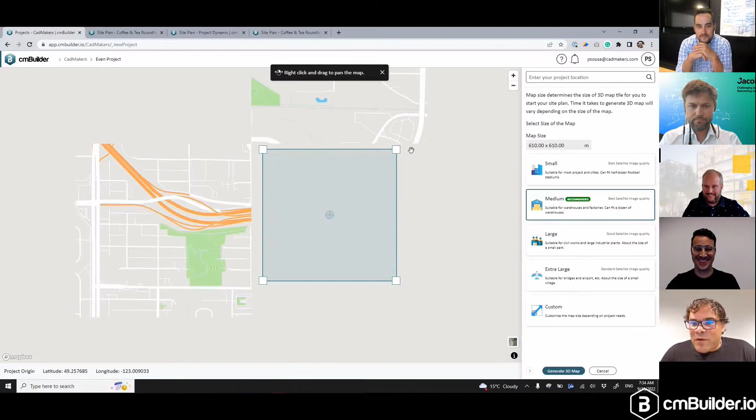For those who don't know, because many won't, cmBuilder is a 100% web-based construction planning and simulation product. It allows you to easily start by entering your address. What we're going to do now is show this new project creation flow. So we're going to call this Event Project. Even project, that's okay. And then you're instantly taken into this interactive map.

So let's go to Dallas, let's go check out what Dominic's doing downstairs. Let's go to Dallas, let's hit any address in the world, but let's start with Dallas. What it's going to do is just move you to that location in the world and allow you to set up a map tile of whatever your site's going to be. Set your pin in the middle of your map tile. For the purposes of this demo, we're going to come back up to Vancouver because we've already cooked the books here and we already have a site set up for this demo.

So what you're going to do is adjust small, medium, large, and you can move around the map tile how you want to set it. We're going to do a little spot here down in downtown Vancouver, BC, Canada, playing the home backyard card.

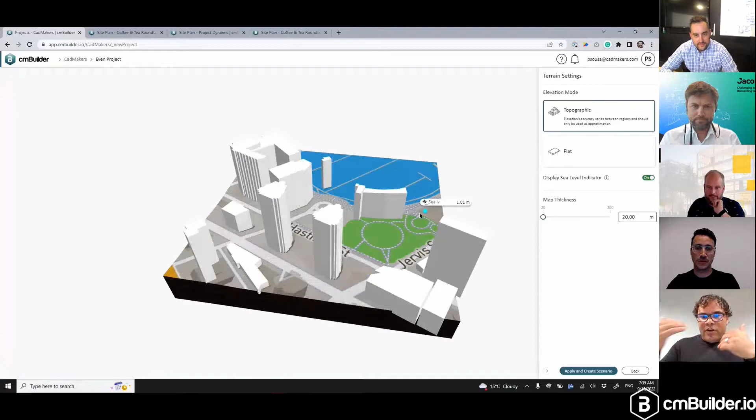Hit generate map. So what's happening now is it's computing, grabbing surrounding building information, topographic information, so you can flip from topographic to flat. If you go to flat, you can also adjust the map thickness if you're doing deep excavation. Some of our industrial customers need that, so you have a fully parametric way to set up your map tile. Let's go to topographic and hit apply.

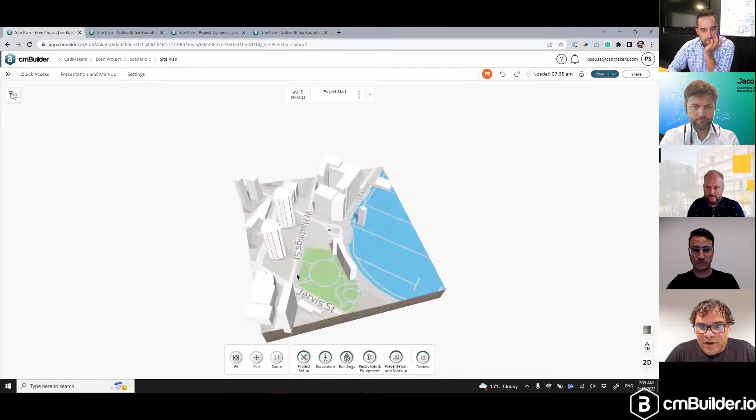And just like that, you're off to the races. So now you have an in-context view of your site with surrounding buildings. Those surrounding buildings are adjustable, you can add new massings on there, and you can start bringing in information. You can adjust from street view to satellite view.

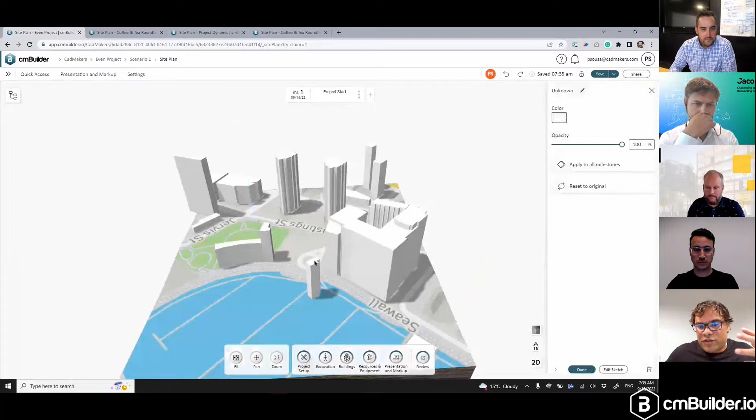You can do 3D mode, 2D mode. And if you go back to 3D mode and put on your topography lines, you can start visualizing the contour lines of the site. So if I go into my settings, you start visualizing what your topographic contour lines are at that site.

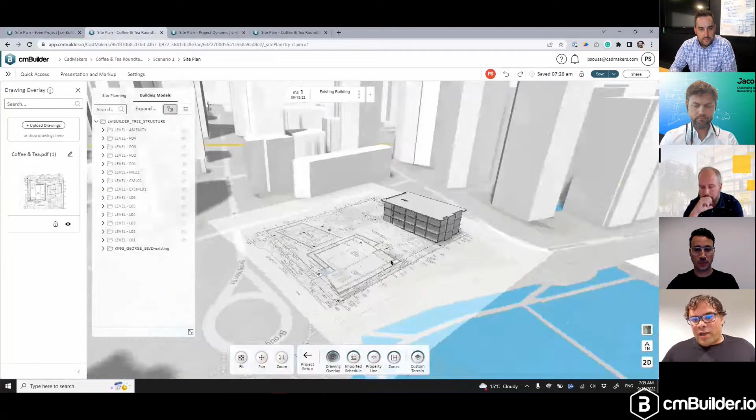Okay, so let's switch over to a new tab. We've taken that same site, imported a drawing, imported a model, and imported a schedule. Step one is we want to make sure we have as accurate a map tile as possible, because the model has the proper elevation in it and it's been snapped in.

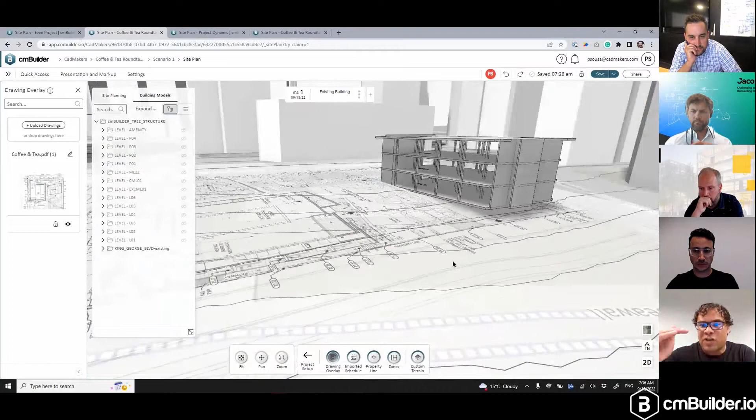We're now going to adjust. We're going to see here that the top of the map, the terrain auto-generated from the map, is a little bit off, as you can see. So the model and the actual topographic map tile are a bit off. We're going to start using our new adjust terrain feature to bring that map tile up and get a very accurate topography.

This is something Yves has been waiting for, and others. So, and us too. Yeah.

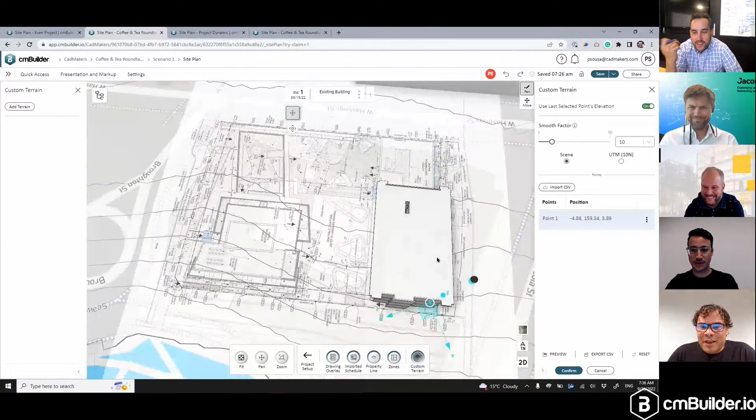The challenge is the speed of generating your map tile automatically just by putting in an address is fantastic, but because it's using satellite imagery and different types of data, sometimes the top of map, depending where you are in the world, can have a tolerance. So this is a recent addition allowing us a quick and easy way to adjust the top of the map and make sure we get a very accurate top of elevation.

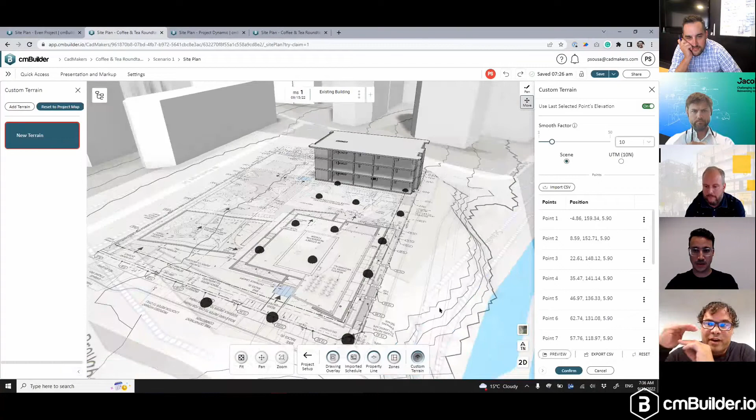We're going to basically snap the map tile up to the underside of the slab or whatever slab reference you're going to use. So what Pedro's doing now is he just added a few points manually. You can also just bring in a CSV, which is the more practical way to do this.

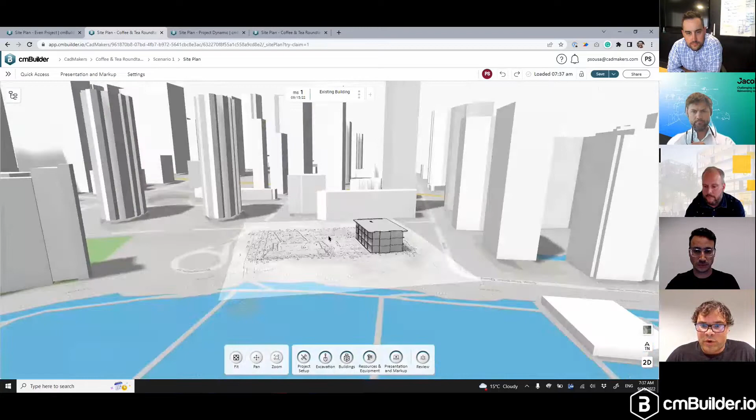So we're just going to refresh the page and you'll see that now the new map tile is going to be lined up where you need it to be. So if you zoom in here, there you go. We've just adjusted it, and you can control how smooth you want that contour to be.

And now once you've made the topo map bang on accurate, you're ready to start simulating, you're ready to start working. So first thing we're going to do is show the schedule integration.

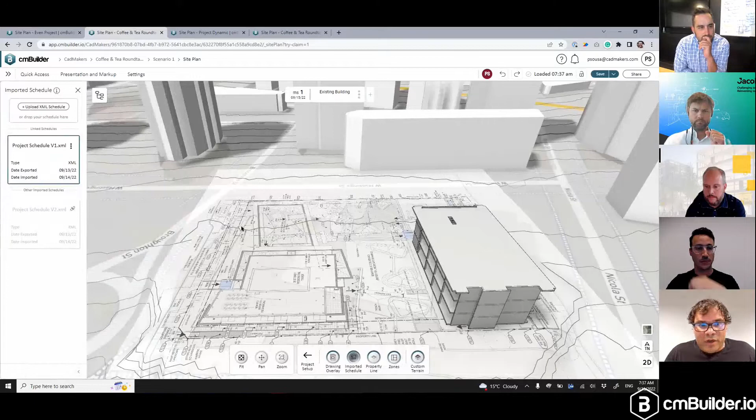So if I just quickly show, I've imported a schedule. It's an XML coming from P6 or Microsoft Project, wherever you are. You have instantly in your UI all the information you need to set up your milestones automatically, and then obviously bringing in BIM models as IFC, FBX, or STEP.

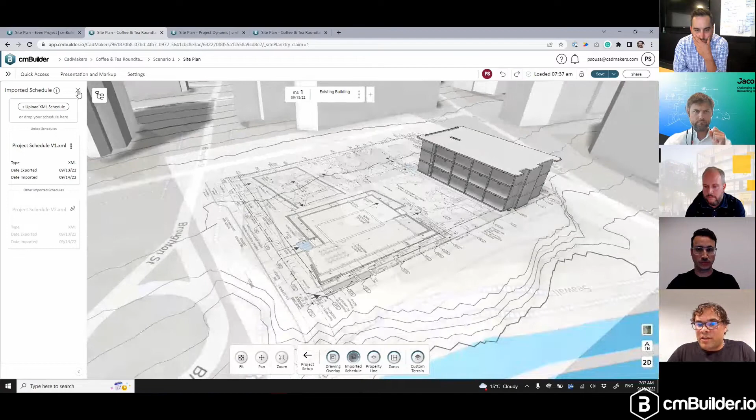We've already set up a few milestones, we've already linked up the model. So now Pedro's going to start simulating. Let's start where you want to start with fencing. Site setup. As we do the fencing, I'm going to grab a sip of coffee here.

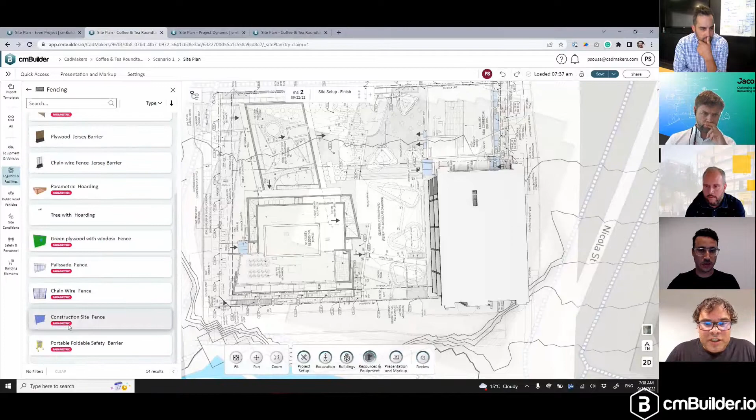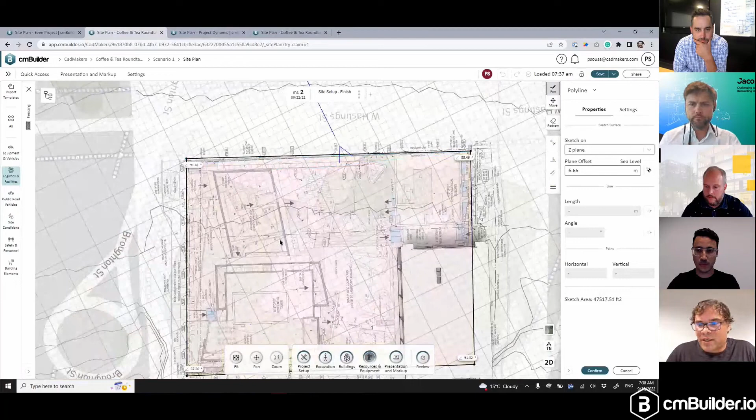Now we're just going to jump into our parametric resource catalog. As you can see, there's a couple new sketching features we could do, so it's really nice being an editor and a viewer on the web. Pedro's just going to drop in a couple points on a polyline and hit fence. As you can see, it automatically generates the geometry of that fence, calculates and moves it onto the topography automatically. Let's put in a gate.

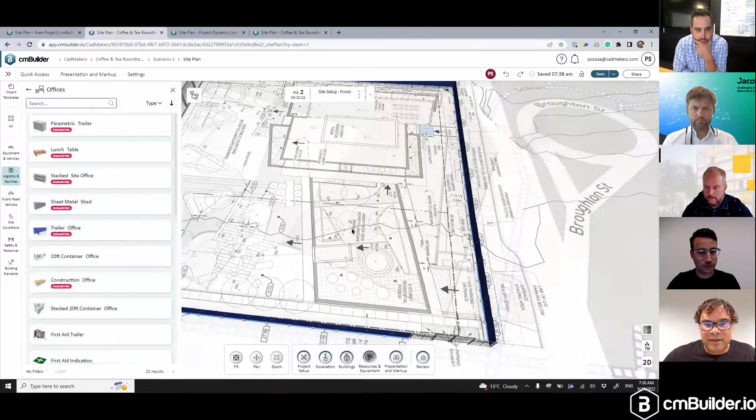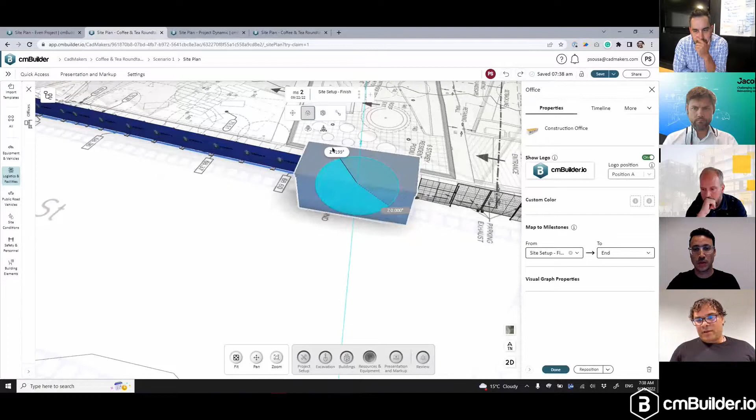So this is obviously something you could go much further with. We're going to show a more completed site at the end when we get into the site setup review or site logistics review. But we're going to add a gate, so think about access. All these resources are parametric—you can drop in a trailer, different types of tanks, soil remediation tanks. We've got hundreds of catalogs of resources. So we're not going to go crazy here.

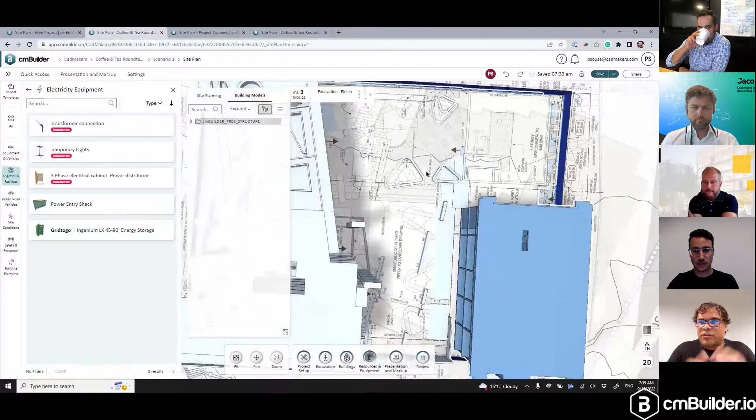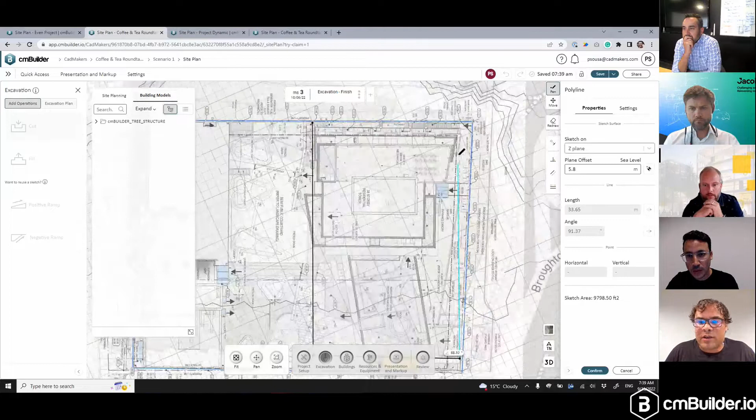Let's finish our site setup and get into excavation, starting the next level of planning. We're just going to do a couple excavation cuts and show a couple milestones using the new schedule sync and model sync feature, which automatically adjusts the input data and links to pre-made milestones. So you don't have to redo the sequence—just sync the model and you've got the same sequence with the new model, or sync your schedule and keep the same milestones, or choose to change the milestone dates from the synced schedule.

Pedro's just going to start drawing on the map and define the elevation. We actually have these handles now—you can just drag up and down the depth of the excavation, so you don't even have to put the values in if you don't want to.

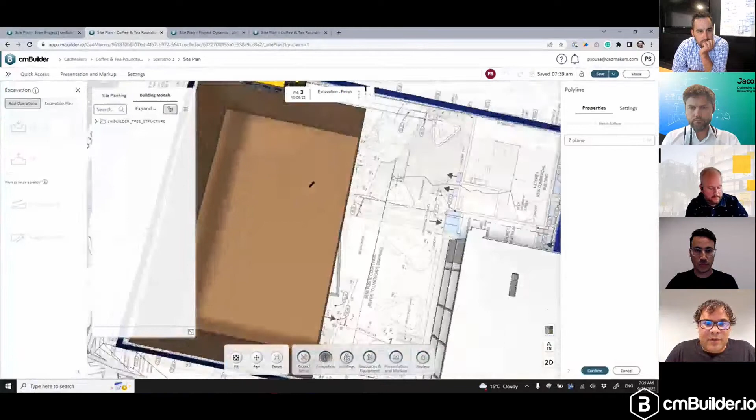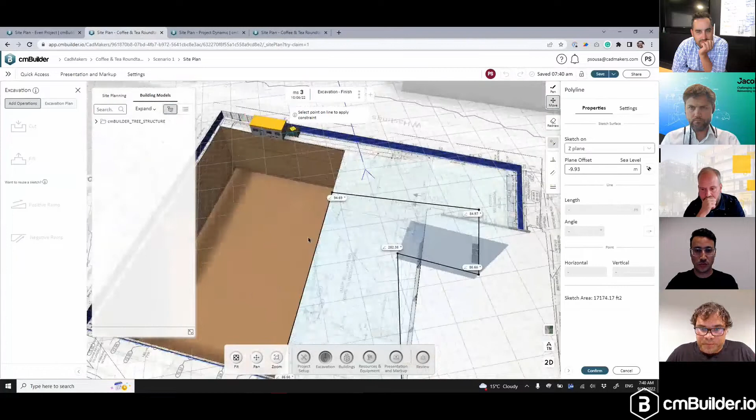Then as you do excavation cut 2, you have some options too while you're doing excavation, to have vertical shoring or sloped information on the excavation. You can control each face individually—you could say one side is going to be sloped, but these other sides are going to be vertically shored. We have a bunch of geotechnical options as well.

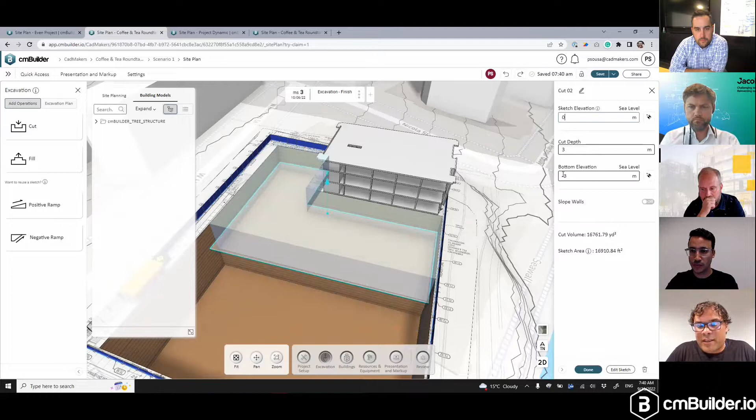What Pedro's doing here is just snapping to planes—for more accuracy, saying I want this line to snap to this plane and this line to snap to that one. This is part of our advanced polyline feature. The idea is to be light, easy, fast, and accurate. As you see, he quickly added a polyline and adjusted each of those lines to snap to faces, getting a perfectly bang-on excavation. We've got different elevations we're playing with here, and so on.

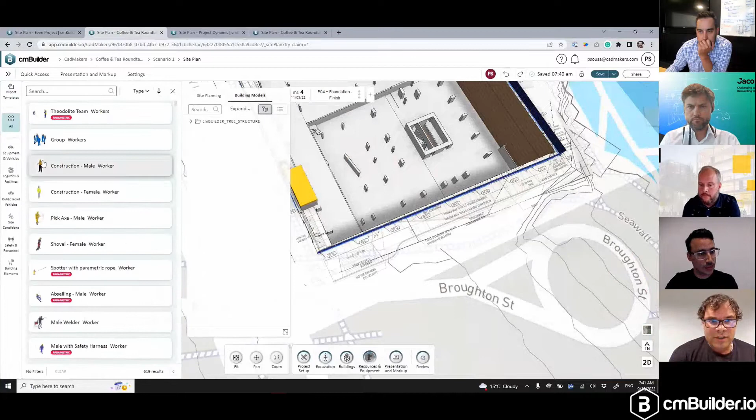Okay, so let's do foundation, and we'll do crane, and then we'll stop. So we've got the foundation. We want to drop in a concrete pump truck, perhaps, and show how those real resources in the catalog link to milestones. So let's search the catalog here for concrete pump trucks—you could just search it. Oh, there you go, so this is a parametric resource. All the boom arm angles are adjustable inside the browser.

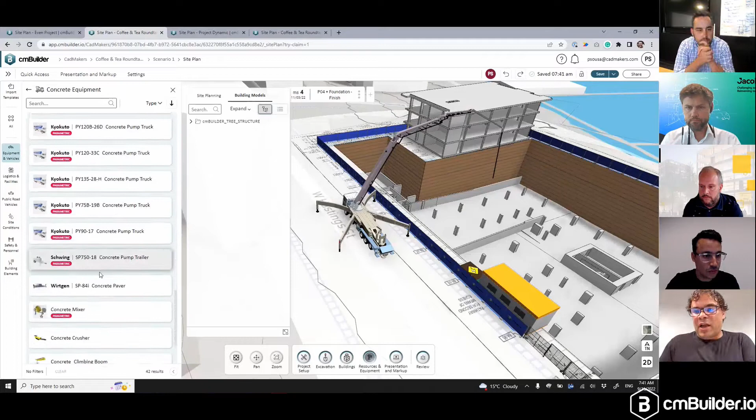Let's put in the concrete truck and start controlling it. This is going to become important when we sync our schedule—these resources link to milestones, so if the milestones change and the schedule changes, the resources will follow. This is where you get that smart connection based on the versioning of the job. As you change your schedule over time, you don't have to start over with your simulation—you can just sync your key milestone date from the schedule, and the actual resources will follow.

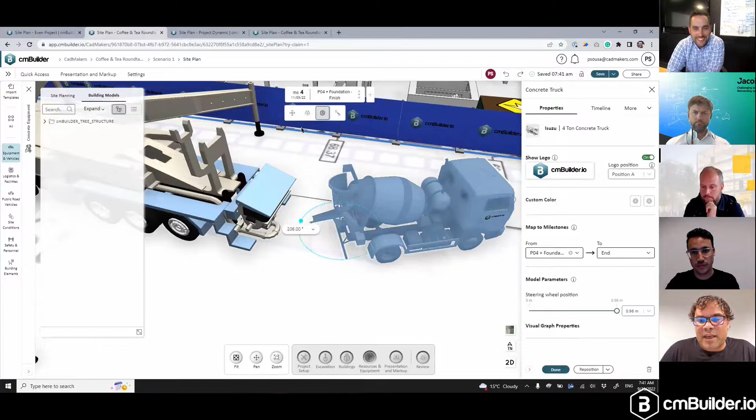Okay, so we're going to put some concrete pump in, and as you can see, they map to milestones—there's a couple features there. Control C, Control V to copy paste. Okay, let's do one more.

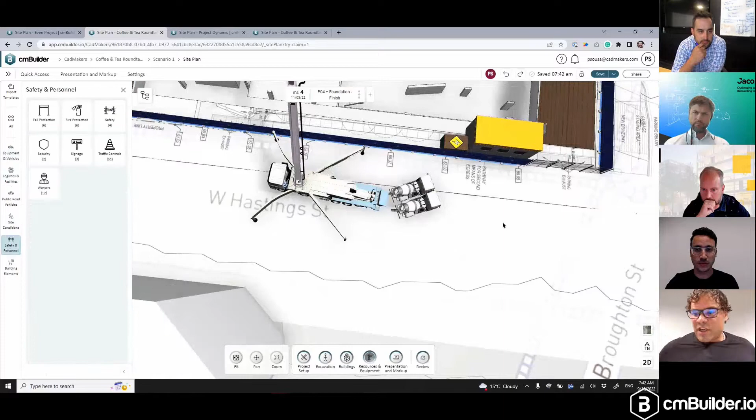Maybe let's talk about placing the crane. And then, can I show some traffic control as well? I think we'll just, for time, dive right into the next one.

Okay, cool, so show the crane and each—yeah, highlight where the model is. So I think maybe if you can't hear Pedro, I'll talk. Yeah, we're going to just show the full model, grab a crane. Let's look for Liebherr. Perfect, drop in a crane.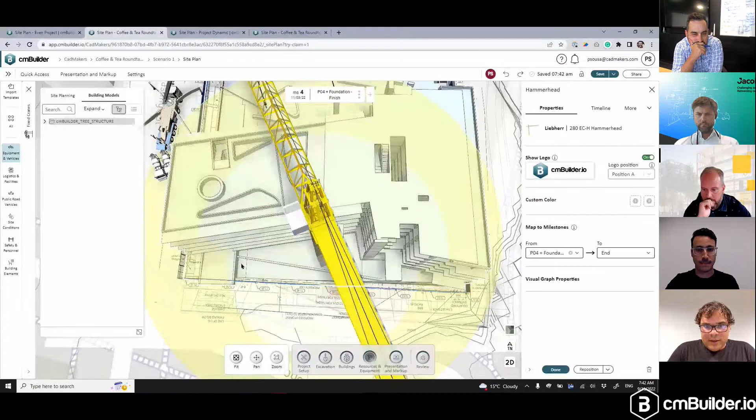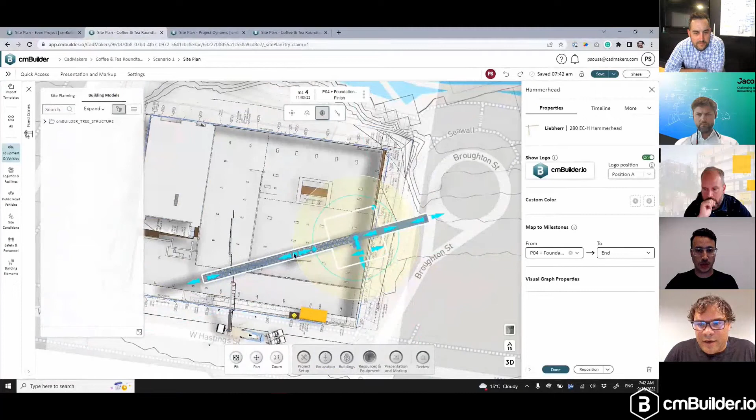So the idea is that it's a fully parametric crane, and you can tie it to whichever milestones you want. Let's say crane setup and crane demob. Everything that happens in between will automatically stay, and as soon as you hit that milestone in your simulation, it's going to leave because it's part of the crane demob.

You get the idea. Now, say we got a new schedule. What do you do? This used to require a bit more manual work, but what we're going to do here is go in and hit schedule.

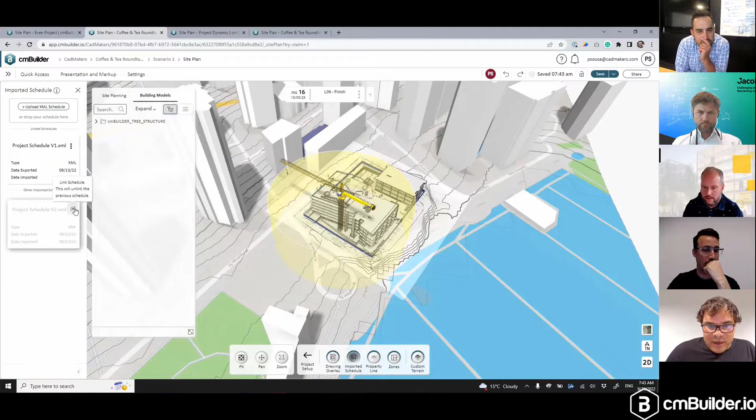So we've got the simulation here with a few milestones. Now you want to link a new schedule. Hit OK. What it does is basically show all the new stuff, and asks what you want to keep and what you want to change.

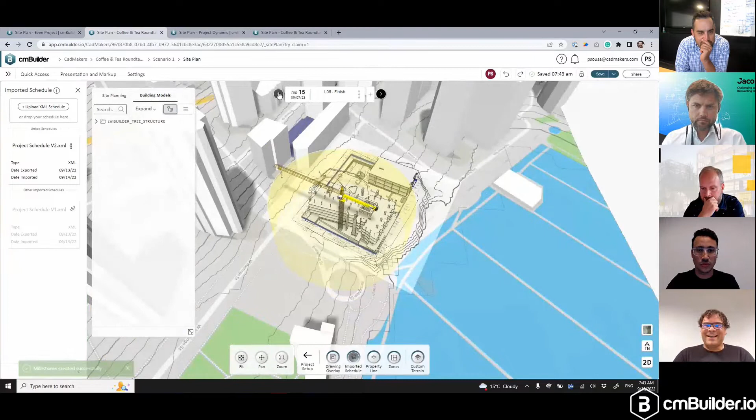Update existing schedule—yeah, so all the dates will be updated to that. We have the new schedule with new dates. Apply changes. It didn't seem like much changed at first, but the dates did change. We didn't add any milestones, the dates just changed, and everything that sticks with it goes along.

Now the next thing, we got a new model, right? So now you've done a simulation, you've done a big sequence. Model changes happen often, especially when you're working through preconstruction. We now have this model sync option, so you can just go in and find the new model.

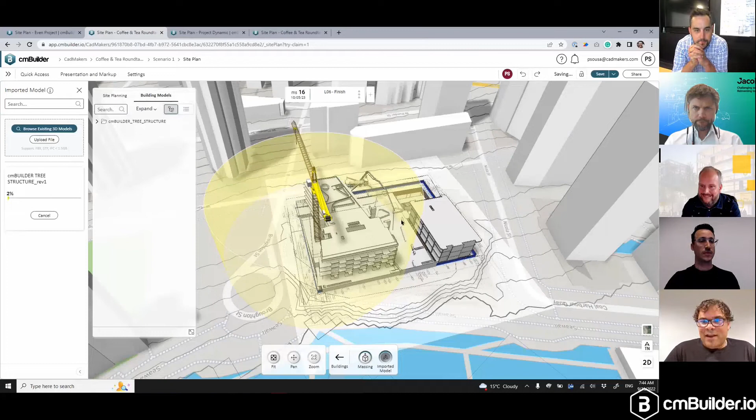Our models are perfect when we get them, they never change. Yeah, yeah.

Okay, so now this is going to take a minute or two to cook, or to update. So we're going to switch over to our completed scenario. All the panelists, if you don't mind, let's go into the completed scenario.

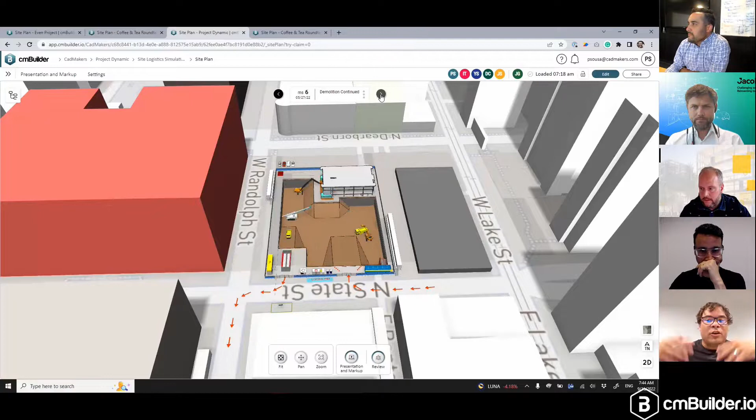So now we are in a finished simulation. Pedro, click through a few milestones here. This is a completed job. As you can see, those initials on the top right show our multiplayer mode—think of it like Google Docs, where we're all in the same scenario at the same time, seeing things happen live. We're watching Pedro's screen, but I'm in edit mode.

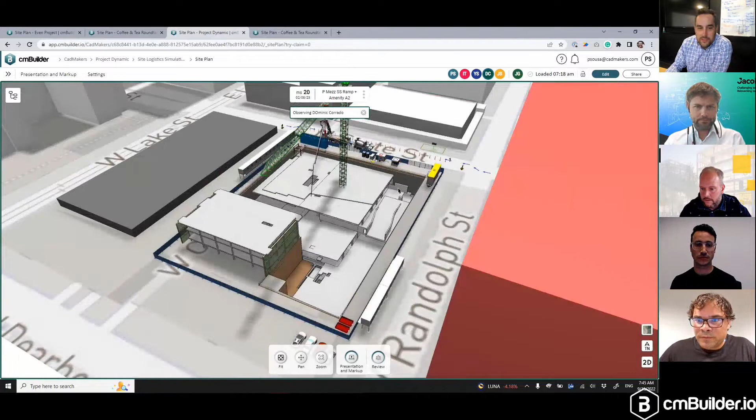So what's happened is—Dom, do me a favor. Pedro, click Dominic's camera, let's follow Dominic. Dominic, review our site plan, maybe the first milestones, and tell us what you want to add, and we'll add it live here, behind the scenes. I get to be the superintendent and tell people what to do. Exactly. Oh, that's cool.

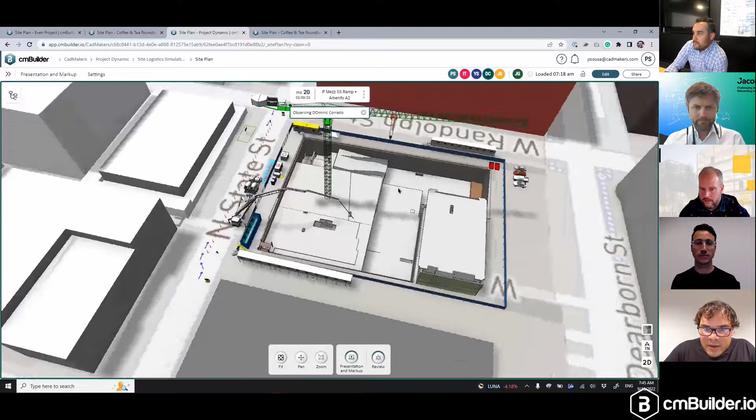Looks like we need a site tent somewhere—let's put it next to the trailers. Okay, I'm going to go in here and add it. Boom, so next to the trailers, you see it pop up on your scene here. It's a parametric resource, so I'm just going to adjust the size. Oh, there it is.

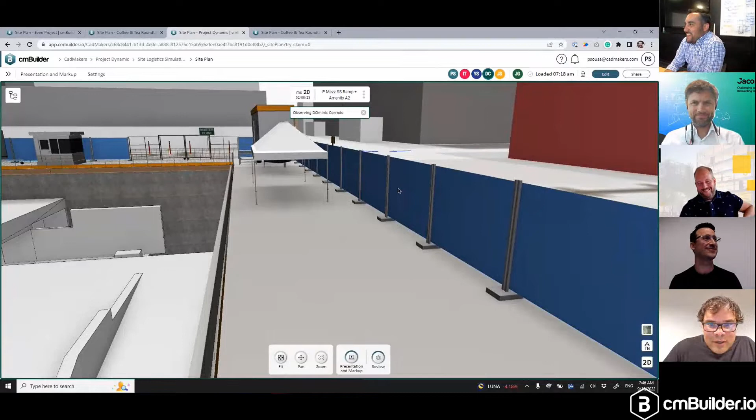So do you think they need some picnic tables maybe? Sure, yeah, gotta have somewhere to eat. So what do we call them—tables, picnic, lunch table? Okay, drop this here. I'm going to just do Control C, Control V. You see some lunch tables showing up?

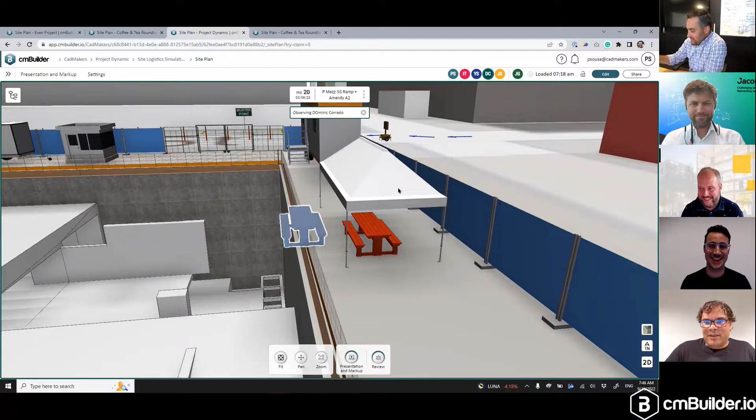My safety guy is gonna be upset about that one—put them inside the tent. Yeah, right now they're eating outside the tent here. So let me move this over and push it here. Boom, boom, there you go. So in the sweltering Texas heat, if your team needs to grab a hot snack or a cool snack, they can get out of the heat and go into your new tent here, Sean.

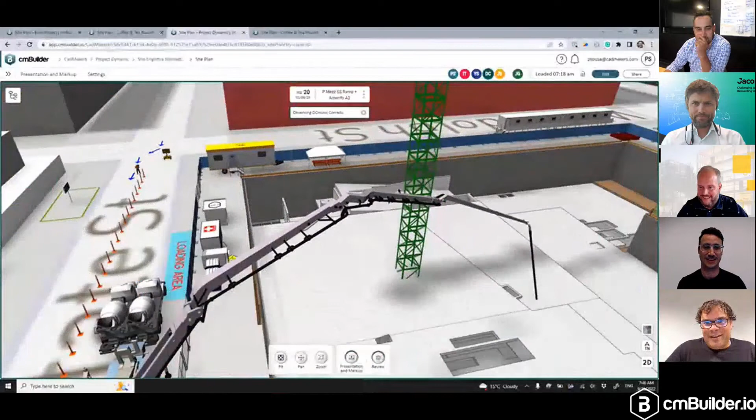So basically what we're trying to show here is that this is all real time. You're collaborating—you can have people on site, people in the office, and just solve the problem now. One big problem we see is back and forth information flying—here's a sketch, here's a drawing, model it, change it, back and forth. Let's just solve this problem in real time. Okay, so that's the multiplayer mode.

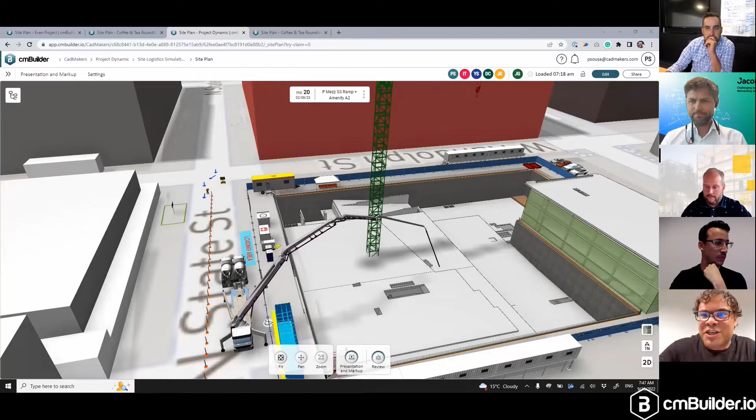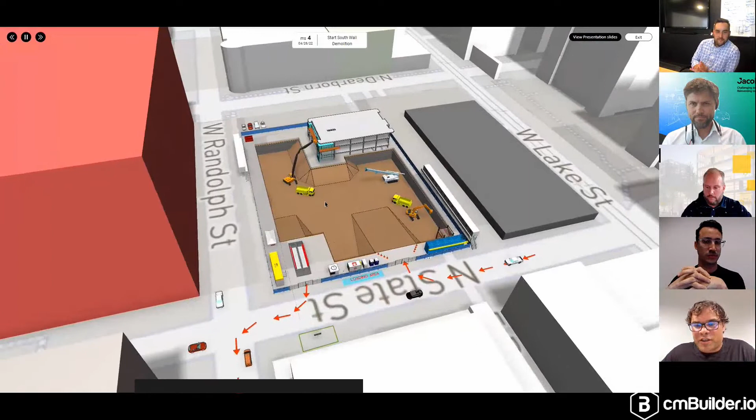This is a shareable link. We can't share to people because of Teams reasons here, but we could have shared the link and you'd all see the simulation play in full. Pedro, show what it looks like in full presentation mode—it basically takes over and plays a full simulation. Once we finish showing this, your callouts come up, your camera angles get stored, and you can share this with a link to any of your project stakeholders, run scenarios, look at different shoring options, etcetera.

So you get the idea. Let's go back to that model sync.

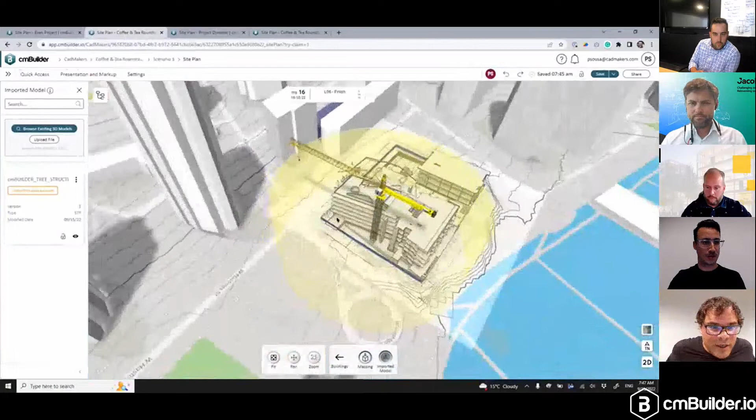Once that model gets cooked, you get an email notifying you that your new version of your model should be ready, and it's still not ready yet. This model takes like 2 or 3 minutes. In the meantime, you want me to do anything over here at this part?

No, I think it's okay. I think just because of time, I don't want to take too much more than that. But basically, that's the idea.

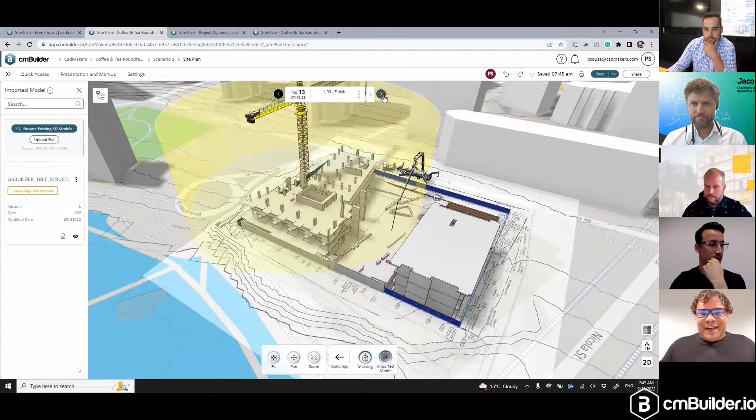So 2 years ago today, we did a demo. We promised to keep improving the product, working with customers, innovating, and we've come a long way with that so far, and we're proud of that. And the team here that's in the room with us, everyone's proud of that.

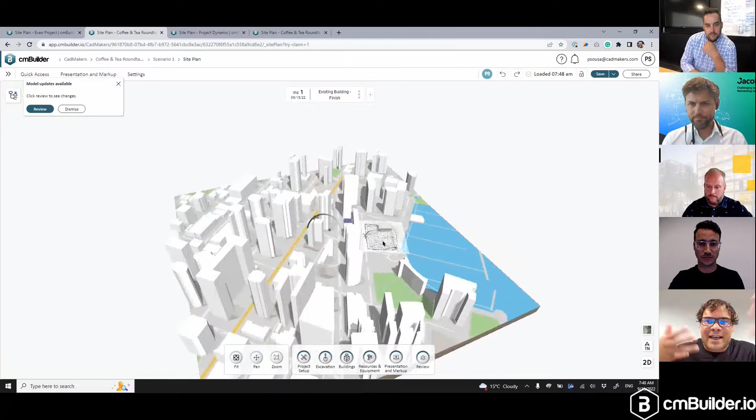It's great. Here you go. So there's the new model. Hit review. Similar to the schedule sync, it just gives you a UI to say, here's all the parts that have changed in your model. Do you want to keep them, yes or no? Then you just select to keep them, see what's been deleted, what's been changed. Hit updated version. The nice thing about this is that your sequence that you've built, your hide-show sequence, your milestones, is propagated.

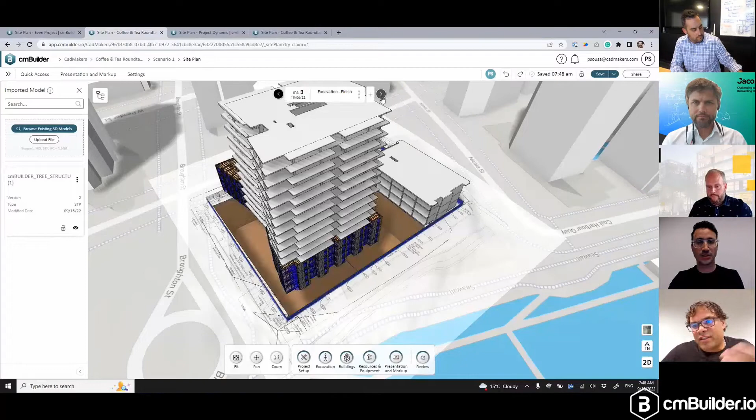So now we've added facade. The use case here is that the parts that change, there's facade parts now, and that's come into the model, and you basically have new information that you can add into your simulation with a new model without having to go manually redo it all.

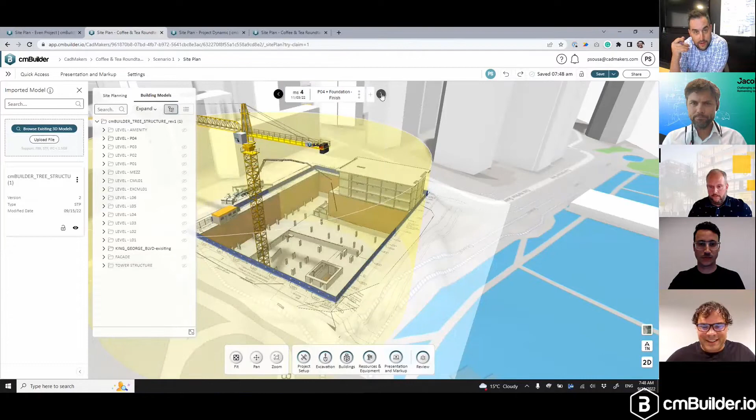Which is pretty crazy to see you do that in 15 minutes because, if this is the old way we would do it, it would take me, I don't know, 4 hours just to get everything into one static model. So no, it's fantastic. A 15 minute site logistics plan.